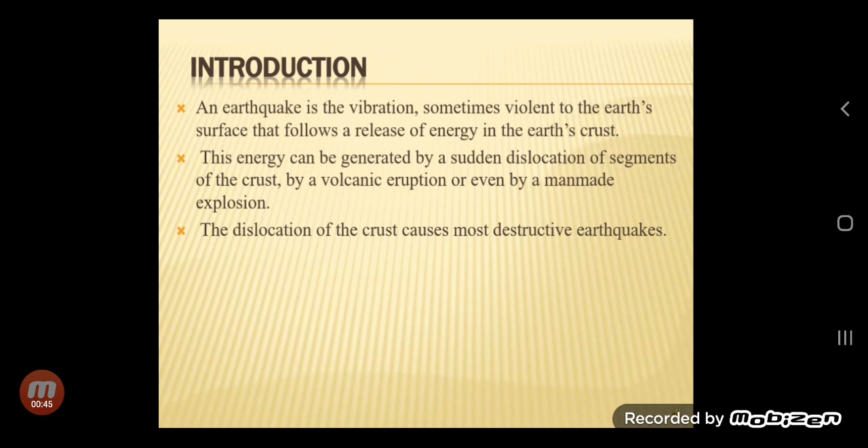We all know an earthquake is a vibration, sometimes violent to the Earth's surface, that follows a release of energy in the Earth's crust. This energy can be generated by sudden dislocation of segments of the crust, by volcanic eruption, or even by a man-made explosion. So the dislocation of the crust causes most destructive earthquakes.

Now we can go through how earthquake-resistant construction is different from our ordinary construction. We all know while designing a building, a lot of forces, or what all are the forces coming over that building, is to be computed. Based on that, the design purpose is done.

Since the magnitude of a future earthquake and shaking intensity expected at a particular site cannot be estimated with reasonable accuracy, the seismic forces are difficult to quantify for the purpose of design. Further, the actual forces that can be generated in the structure during an earthquake are very large, and designing the structure to respond elastically against these forces makes it too expensive.

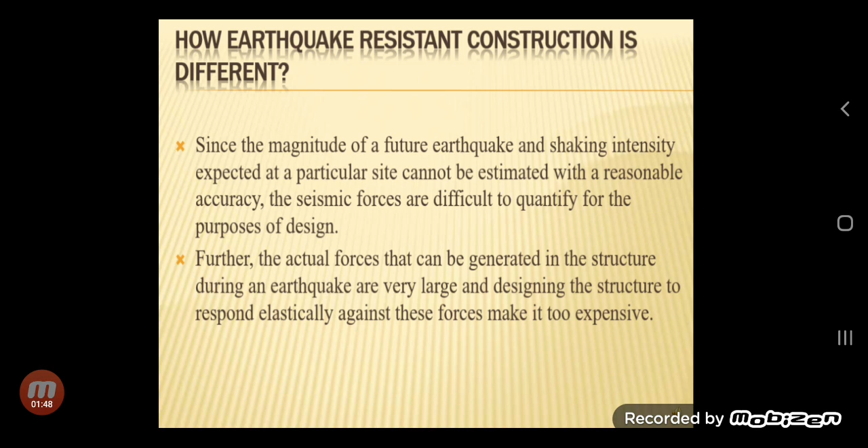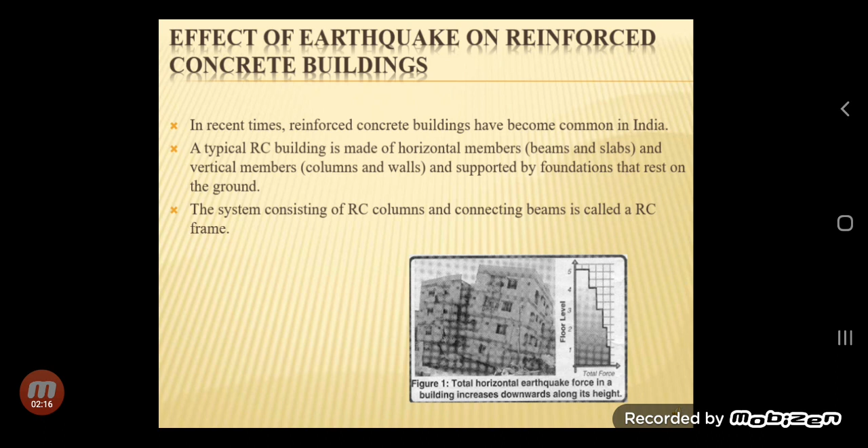The effect of earthquake on reinforced concrete buildings: a typical RC building is made of horizontal members such as beams and slabs, and vertical members such as columns and walls, which are supported over the foundation which rests on the ground. This system consisting of RC columns and connecting beams is called an RC frame.

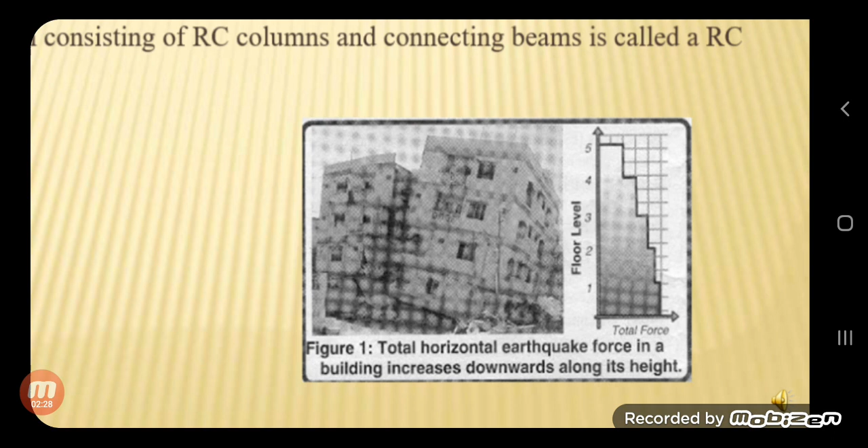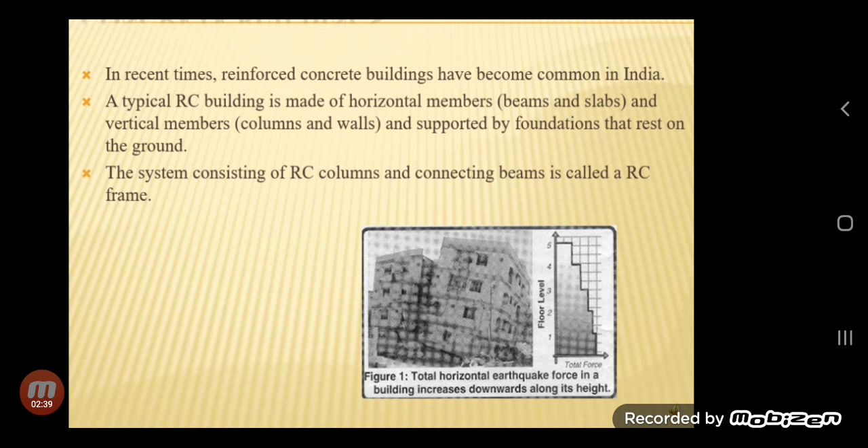In this figure, you can see that the total horizontal earthquake force in a building increases downwards along its height. That is, for the ground floor, the horizontal earthquake force is maximum, or more than the other top floors.

Now coming to seismic design philosophy, we know the severity of ground shaking at a given location during an earthquake can be minor, moderate and strong. Relatively speaking, minor shaking occurs frequently, moderate shaking may be occasional, and strong shaking rarely.

So earthquake design philosophy in earthquake resistant building is an important concept that should be dealt with in the construction of an RC building or any high-rise buildings.

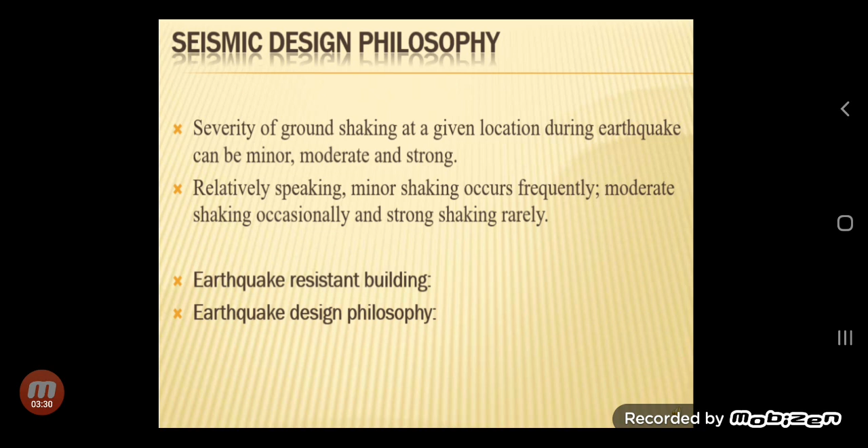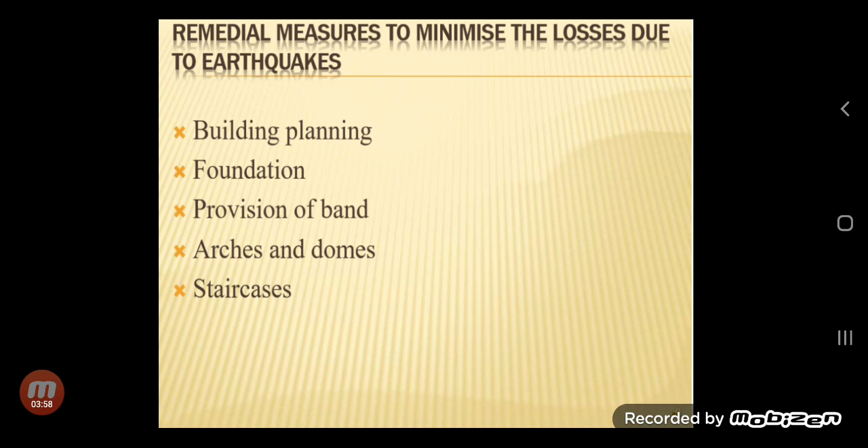Some of the remedial measures to minimize the losses due to earthquakes are building planning, that is, the planning of the building to be constructed should be proper and based on earthquake considerations; foundations; band provision; arches and domes; staircases; etc.

Now coming to a topic, mid-level isolation. This mid-level isolation system is installed while the building is still being used.

This new method entails improving and classifying the columns on intermediate floors of an existing building into flexible columns that incorporate rubber bearings, known as a base isolation system, and rigid columns which have been wrapped in steel plates to add to their toughness. So this is a new method considered in earthquake resistant structures, where a mid-level isolation system is provided.

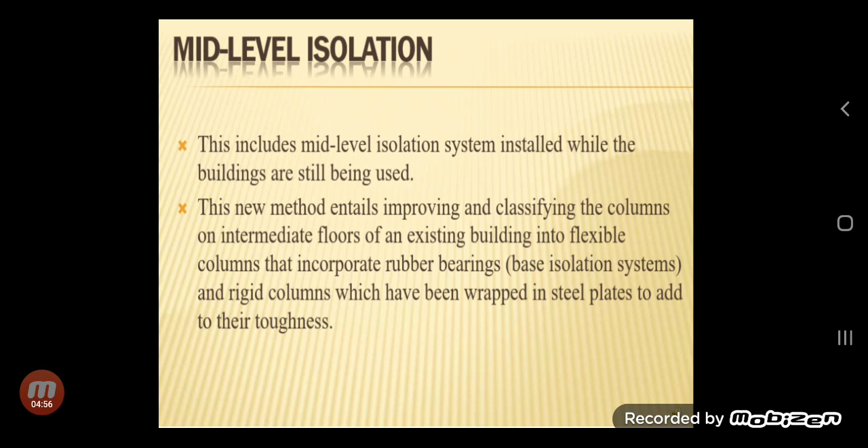Now coming to earthquake resistance using slurry infiltrated mat concrete. In short, it is SIMCON, which is widely used in earthquake resistant building constructions.

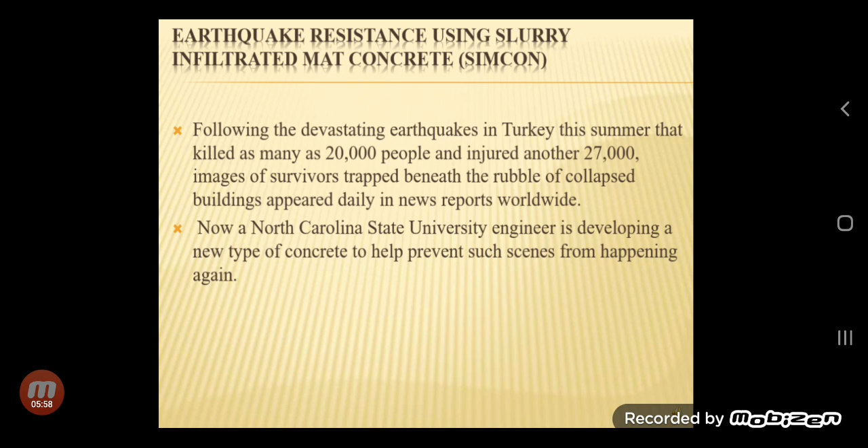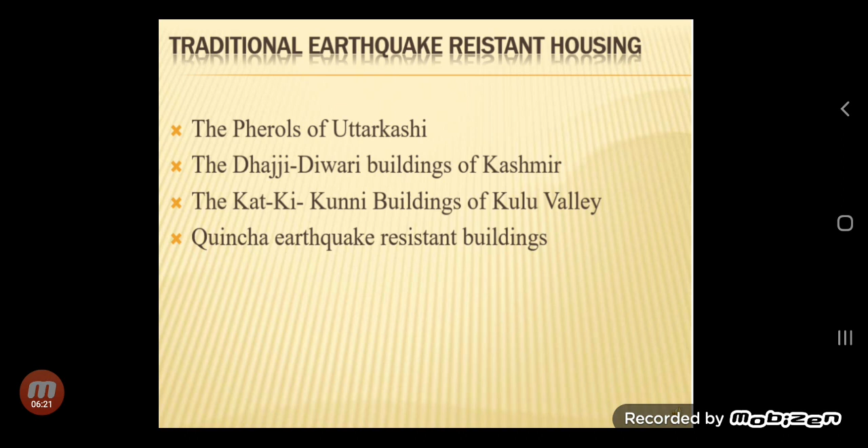As a conclusion, we can say there is a lack of awareness in earthquake disaster mitigation, which involves avoiding non-engineered structures with unskilled labor, even in unimportant temporary constructions, which can help in a great way. So the building should be constructed as per guidelines given for earthquake specifications, like Indian standards, Euro codes, etc.

As per the seismic zones considered, we have to design the structure as per the guidelines given by the standards.

Statewide awareness programs have to be conducted by fully exploiting the advancement in information technology. Urgent steps are required to be taken to make the code provisions regarding earthquake resistant construction undebatable.